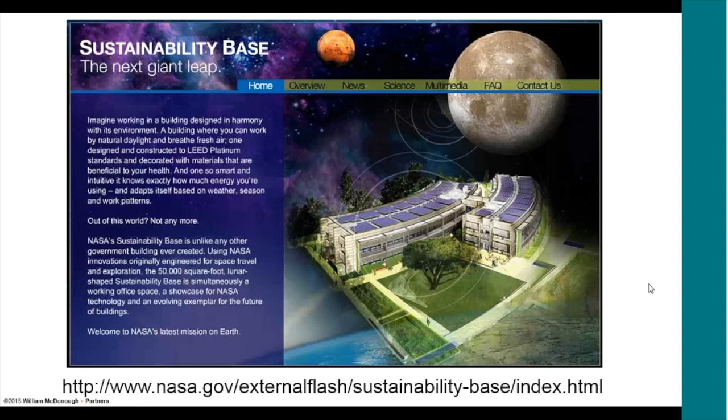So that was great. I wanted to just pose the first question because it's been a while since I've looked this statistic up. How many people can actually say how many ZNE buildings there are in California? I think it was less than a handful last I looked. I think that I've done one of them, and 3 undocumented.

So maybe it's 10 that are out there and just not documented. One undocumented was a residence. Okay, yeah, that was published recently, but that's important because we need models for people to see the possible. And so the 2 examples I'm going to illustrate here are, I think, examples for people to learn from, but they're also based upon value decisions, not simple economics.

I'm not going to explain all of the project at NASA Sustainability Base. If you want, you can copy this down, or you can simply Google NASA Sustainability Base, and you'll see a very elaborate online presentation that they use to explain the building and the systems. And LBNL has an active project that they are documenting, some of the performance since occupancy and the way that they're testing the project. So I'm not going to.

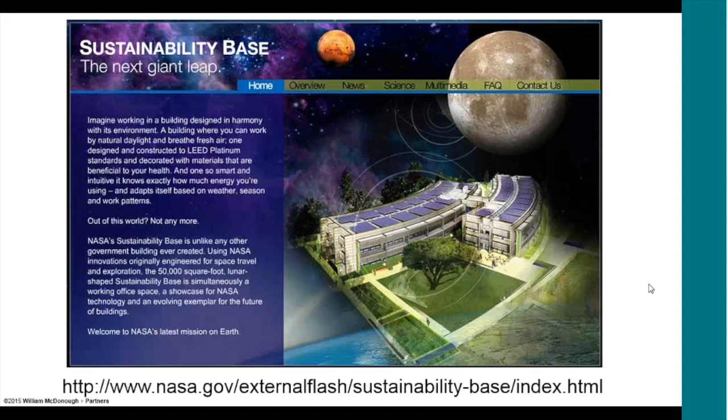They also have a very neat little diagram of the 99 geothermal wells that are on the playground, and I'm not going to show you much more about that either.

But I want to talk a little bit about efficiency versus effectiveness, and this is good because we're about to go into lunch, and some of the slides I've chosen are going to be good for you. We need efficiency. We need all of the efficiency that we can possibly get. Let's just assume that. But what are we really trying to accomplish?

But I think what we're talking about here is going beyond efficiency and talking about, if our metaphor is food, let's talk about nourishment. And what are we actually trying to accomplish with that nourishment? When I prepare meals for my family, it's about family and health and wellness and happiness. And let's just play with this metaphor a little bit.

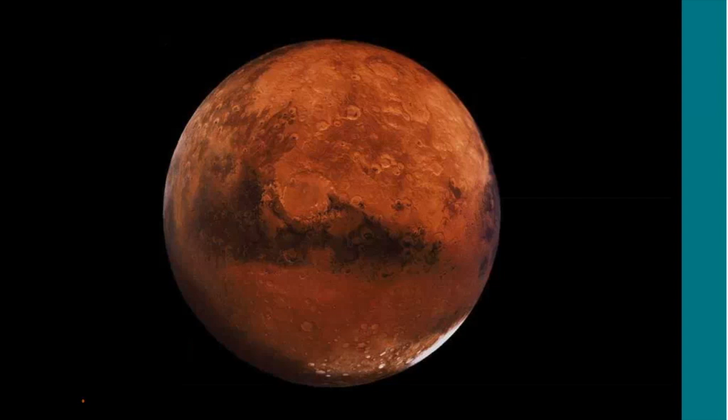So when you have a client that comes to you with that type of goal, that's a pretty big ambition. NASA came to us, they talked about this building being engineered. They were going to be engineering solutions for Mars, but we said before you go to the red planet, you got to come to the blue planet. These are people that go to space and they leave very careful footprints where they go. These are the same engineers that we worked with at the start of the project, the engineers that developed systems to be in space.

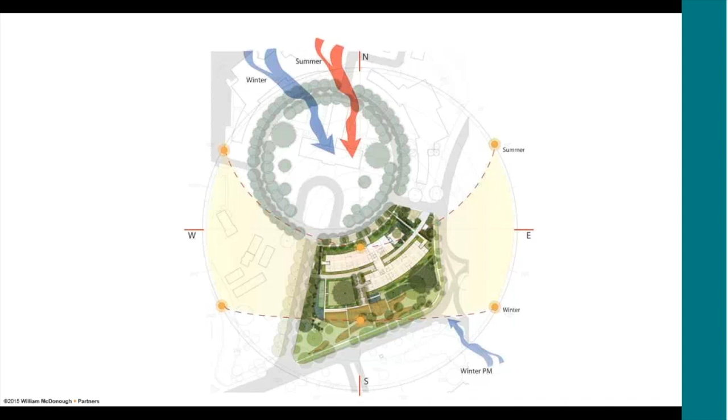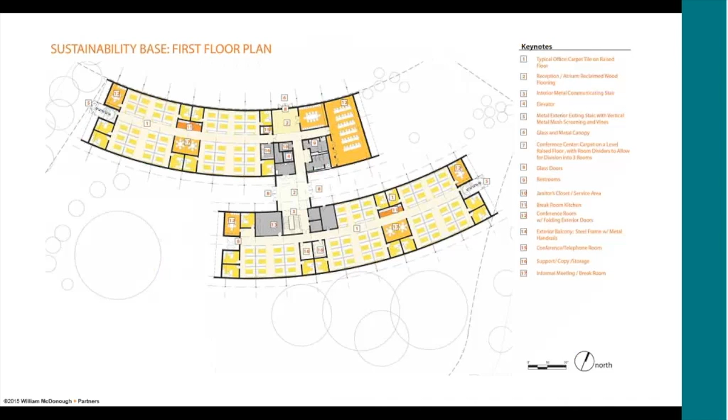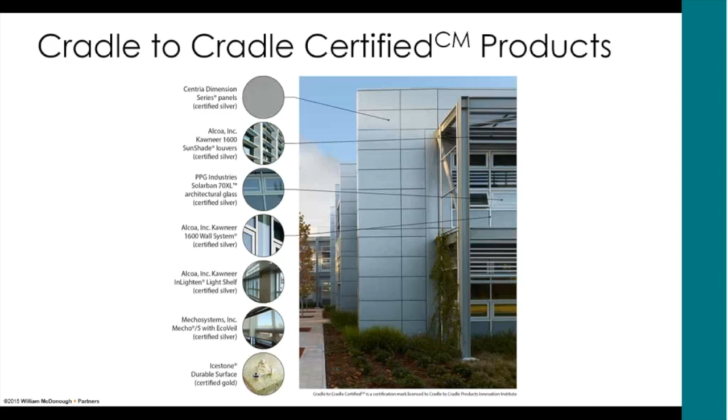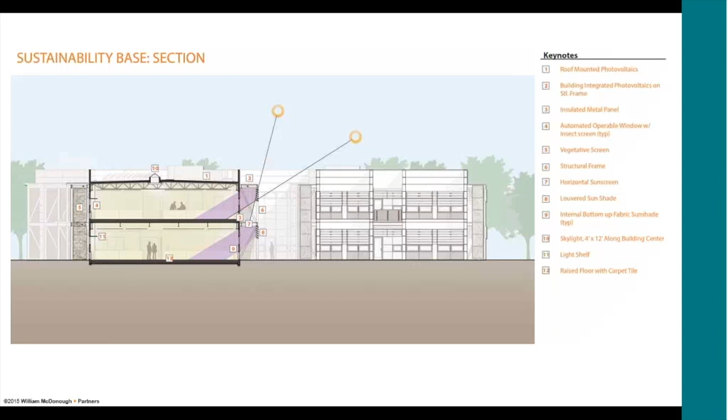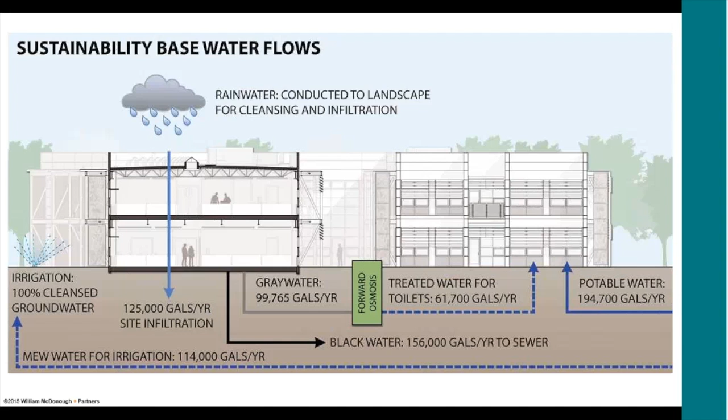The building is built with quality materials that will last over time. We prefer cradle-to-cradle certified products because we think they're the highest quality in the world. Daylighting is incredibly important. The entire floor plate was designed to carefully study daylight distribution, as well as the water systems. They will use a fraction of the potable water, and what they do use is designed to be recovered through a graywater system.

The office environment, I'll go into this a bit more. We adopted this NASA strategy called scarring. Does anybody know what scarring means? Scarring is when you're going to send something into space, and it's incredibly expensive to send something into space, so you want to scar it to anticipate all of the things you're going to attach to that in the future. So the entire building is designed to be scarred to anticipate changes in future technology.

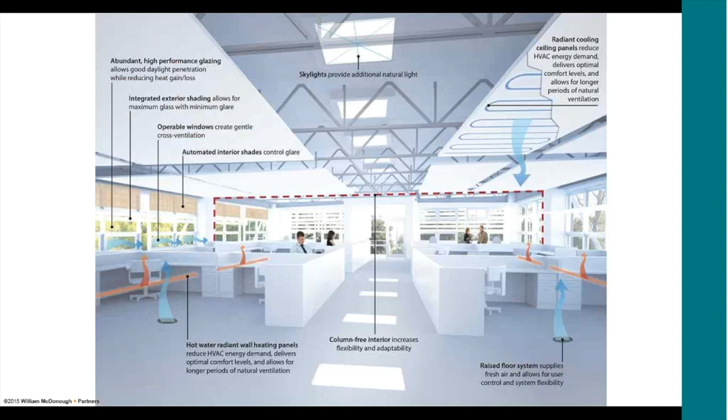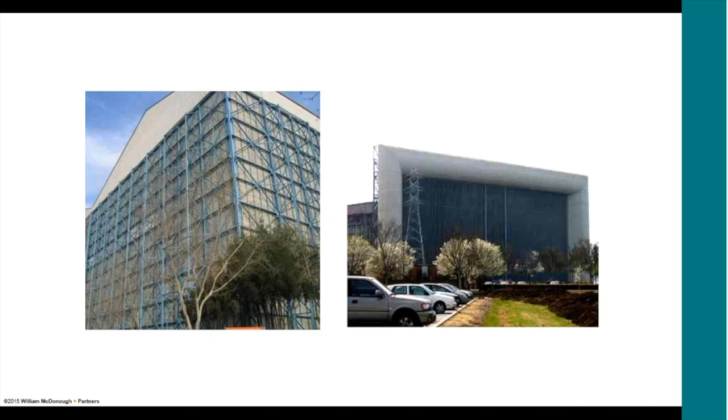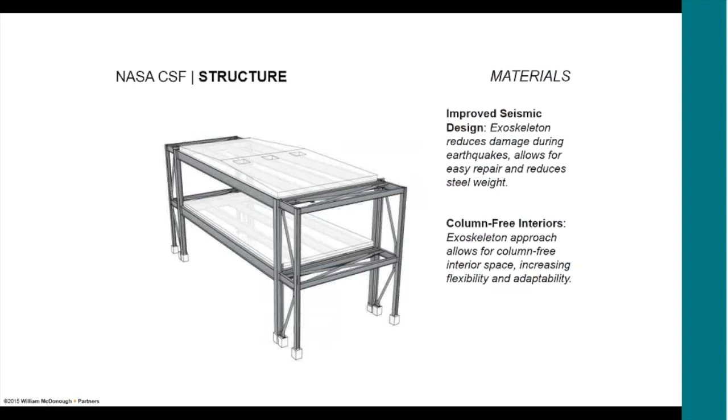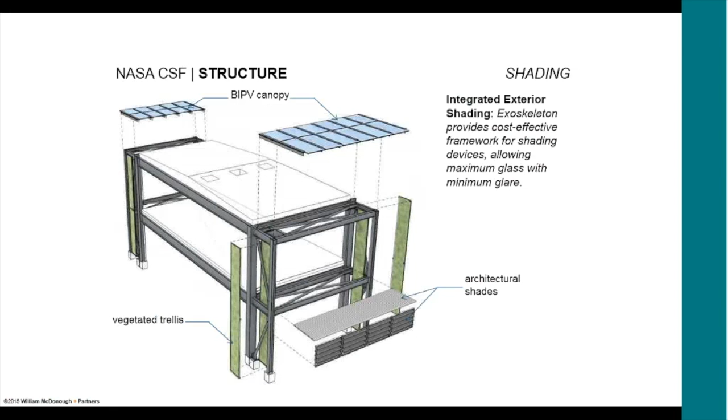One of the key informants for us was the exoskeleton. If we could learn from the other buildings at NASA Ames, where the structure was moved to the outside of the building to create vast interior spaces, how much flexibility would that gain? Once we moved the structure to the outside, it became part of the understanding of the building, and it took away the columns from the interior, but it also became an armature to mount the things we wanted on the outside, because in architecture, one of the most expensive things is trying to afford all these mounting positions for sunshades and living walls. But now we had our structure on the outside.

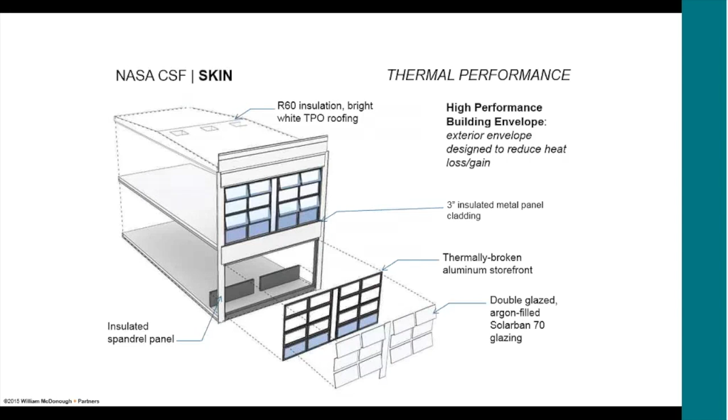Very efficient envelope with operable windows low and high. Insulated more than you would, to address our cooling mostly. We have displacement ventilation as well as operable windows, low and high, to ventilate the space.

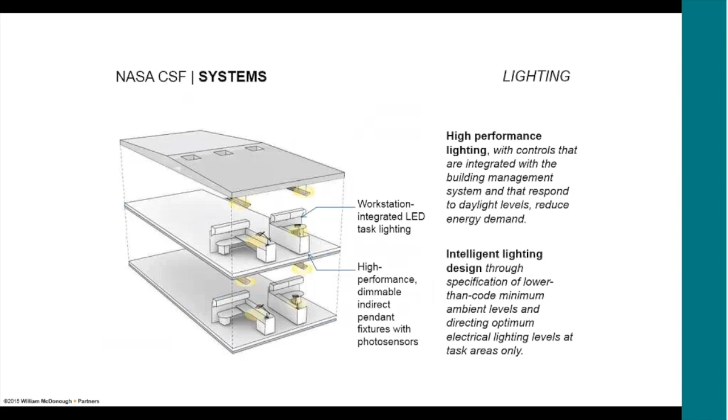Lighting is really important. By model, NASA anticipates they will need to turn the lights on 40 days out of the year. That's a good number, but to get there takes a lot of intelligent modeling.

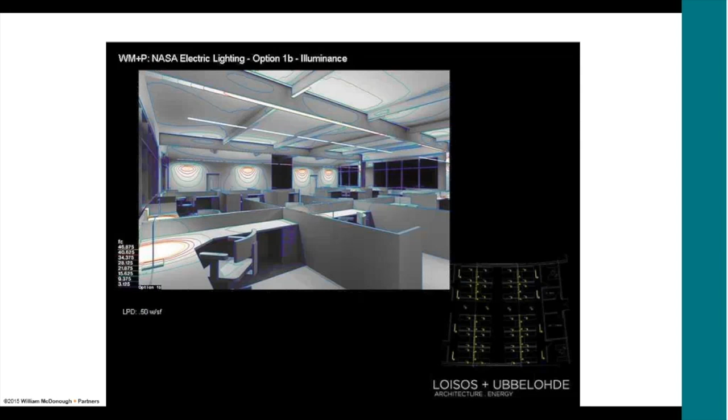And we studied daylighting and glare quite carefully to tune the sunshades, light shelves, and window shade controls to optimize lighting. So these are just some examples of the images that we use.

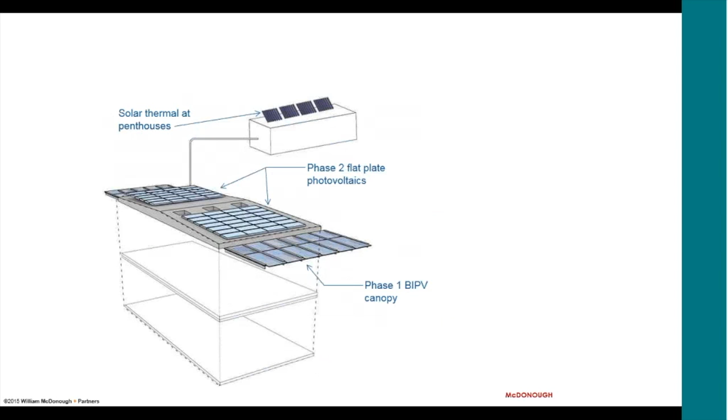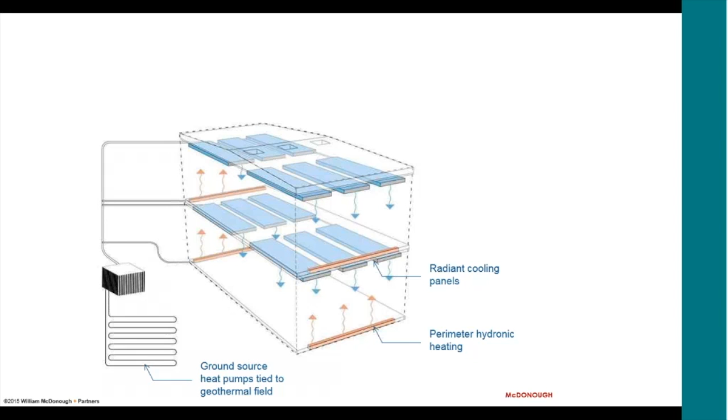And then lastly, now that we've made the building as efficient as we possibly can, we mount BIPVs and PVs on the roof, and we couple to a geothermal system, 99 wells on the parade ground that are used for radiant heating and cooling in the office environments.

What ended up happening is instead of building additional PV cells as shade structures over parking, NASA got a lease with Bloom Energy for a next generation Bloom box designed to burn or consume biomethane. With that, they are by far net energy positive. Our goal was 30%. They're over that now. The balance of the energy then goes back to the base.

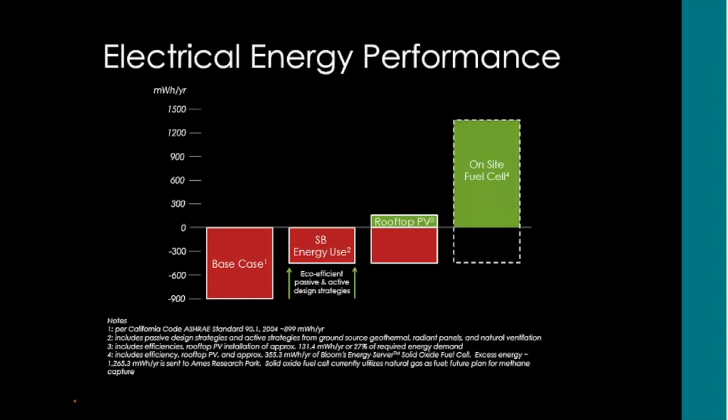On energy, the director of the base was very smart. As you know, military sites benefit from WAPA power, and WAPA power is significantly less expensive than PG&E power. So why would he go to all the bother to put on PV panels and a fuel cell if you've got super low power rates? We said, well, if we're doing a 50-year building that's going to rely on mountain water hydropower, is that so smart for NASA? So they actually are not on WAPA power.

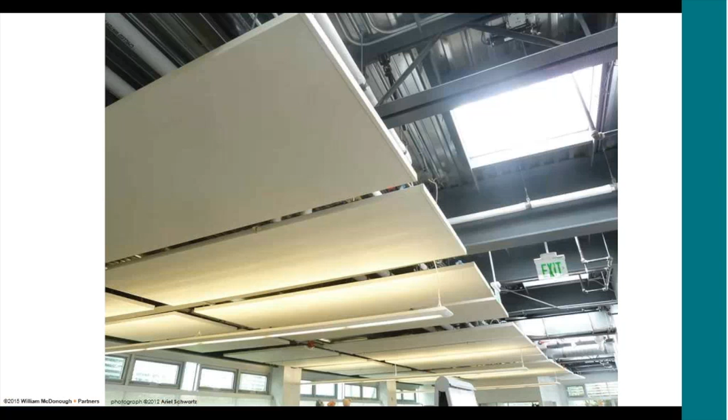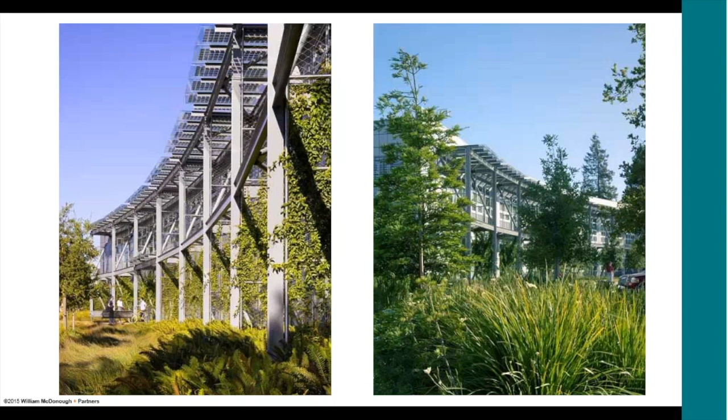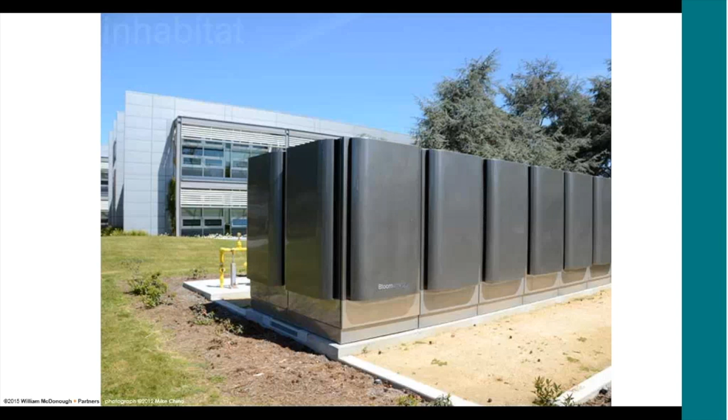Excuse me, I'm just recovering from a cold.

Nike European headquarters - what's interesting about this is that it was subject to a study. If you Google Nike European World Headquarters Energy Study, this is a building that was designed 20 years ago, recorded in this independent study as one of the most efficient buildings in Europe at that time. 35% of the energy comes from geothermal coupling.

And set in Holland, the building really relates to water. What's interesting about the building, so if anybody wants to copy it down quick, is there's no air conditioning. It uses natural ventilation and thermal mass - the benefits of thermal mass here coming out. The ground-coupled heat and cooling - this is a water retention for fire water, but it could have been used for coupling. It's not, interestingly.

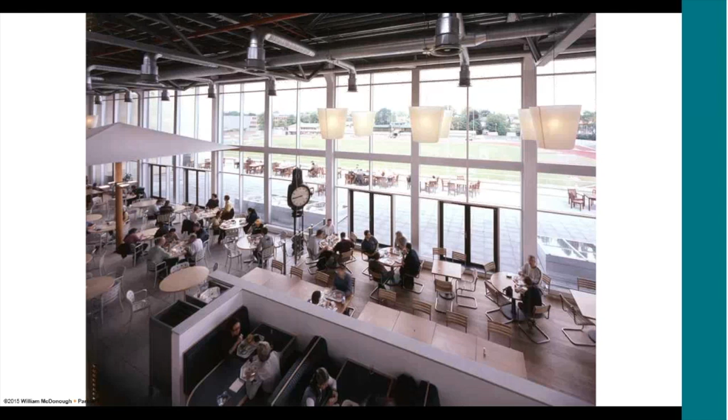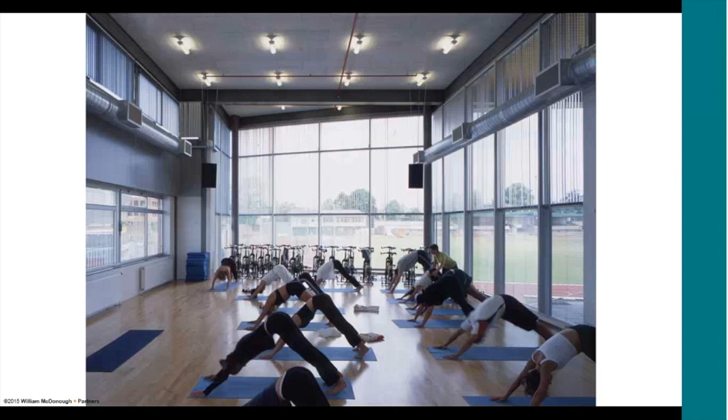This is the running track in front, and this is one of the fitness centers. And this is the building. It's still, I think, one of the highest performing buildings in Holland at this time.

So I could have brought a number of examples of ZNE buildings. Just in closing, we're very lucky to have great clients that are making decisions on energy, not just on dollars, not just on compliance or future-proofing - those things are very important. But we're lucky enough to have clients that have a vision about the importance and value of communicating to our children the importance of addressing this energy and carbon crisis that we have.

Thank you very much. Thank you.